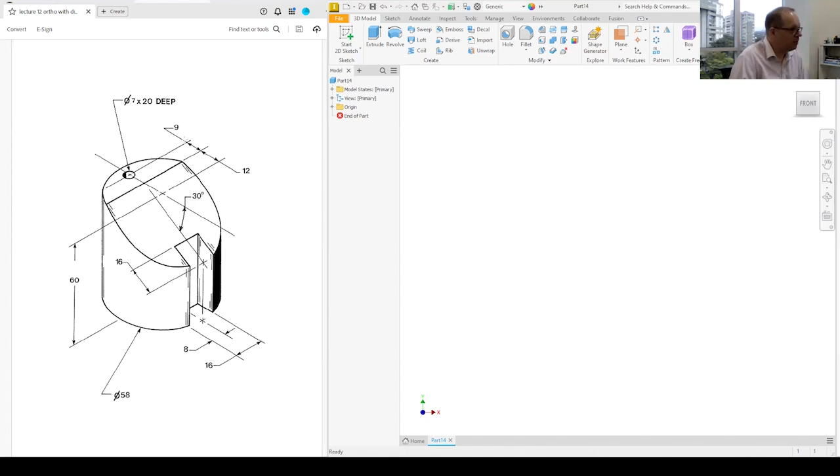So we'd have to measure it there. We can't just make the cut and then put the slope in. We have to first make the slope and then create the cuts.

That might be, think about that for a second, right? Because we don't want to cut in the direction of the slope that we create, but we probably have to do something with projections and similar.

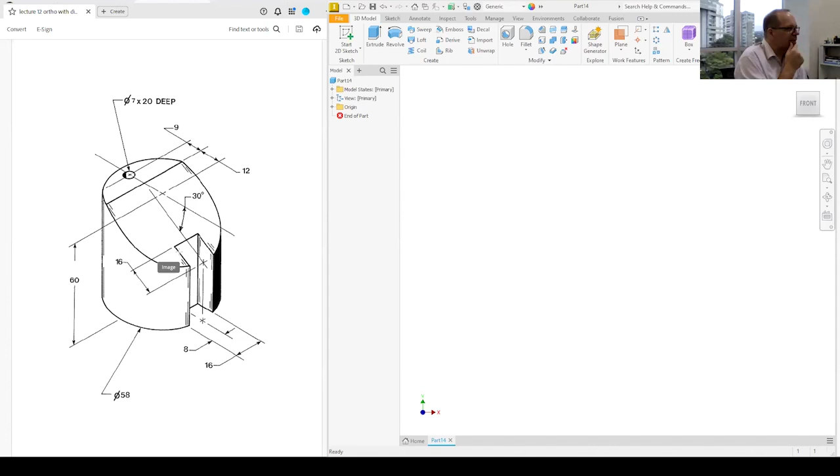All right, but let's get started. Oftentimes you get yourself going and then see where it leads you. First part is easy. Let's put the circle.

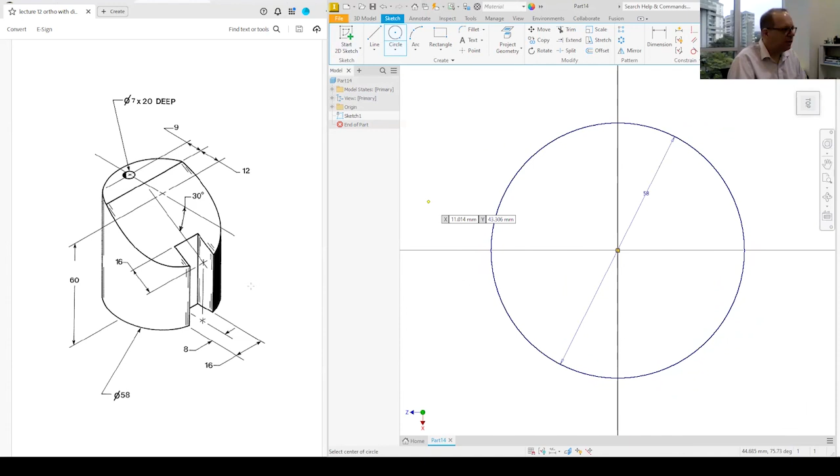What's the diameter? It's 58. Right there. Let's just do that. Might as well.

Extrude. Looks like the top height is supposed to be 60. So let's do that. There we have our outline.

Now let's see. This kind of the edge that we're going on is supposed to be

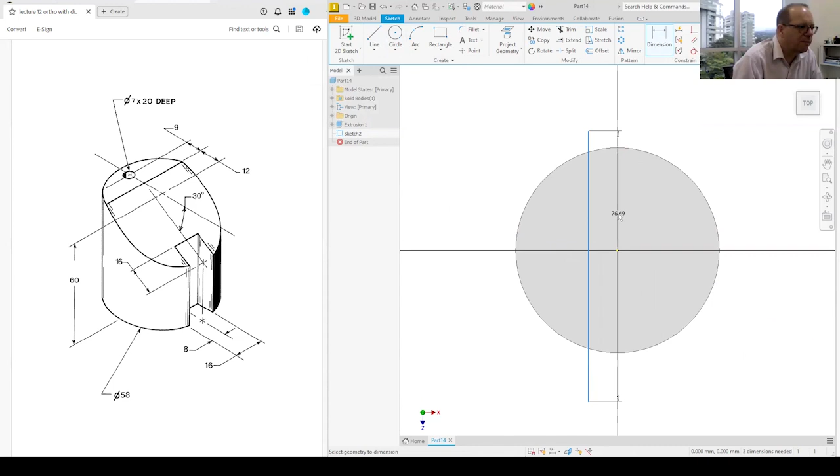12 from the center. So let's do a sketch up here. We'll do a line. As long as it's a vertical line, doesn't matter how long it is, just longer than the circle. And we say we want to do this distance to the center there is supposed to be 12.

Right, that'd be that distance right there. So this is where our slope is supposed to start. So maybe what we'll do, we will create ourselves a plane

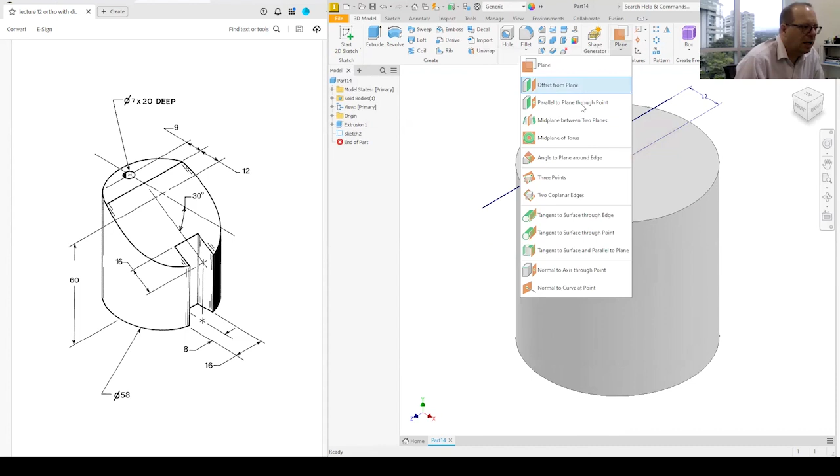angle around an edge. So we want to have this one, and we want to... doesn't want to do that. It's not angle to plane around edge. That's what we wanted. Maybe we wanted this one.

Oh, okay, I just misunderstood what I was trying to do. So that's what we wanted to do. And now we want to have it 30 degrees.

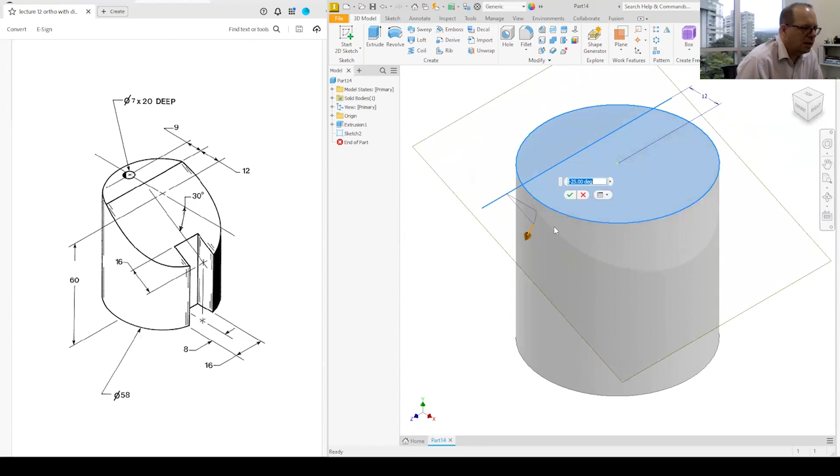Sometimes a little hard to see where it's calculated from. So we can say here, that is 30 degrees. All right, then we'd have, put in our minus 30.

And we have this. So now we could create this cut. Yes. We cut this here. Yes, this is what we'll do.

So we'll create the cut, and then we'll use our regular plane up here to draw the kind of the slot that goes down. So let's do this.

We'll sketch something on this top plane here. What we'll do is we'll create a rectangle. I think it doesn't really matter how big it is. Let's just sketch it in.

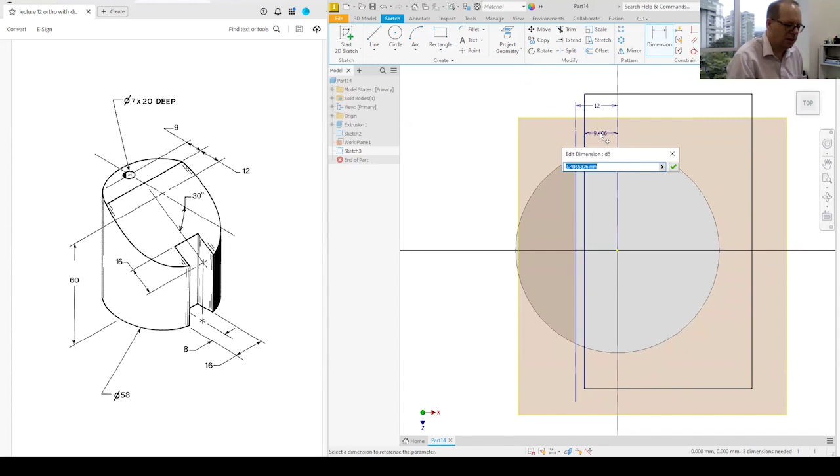Just bigger than our circle. And then we'll say distance to there has to be 12. Overlap. Then we'll say

finish. Then we want to extrude, but we want to do a cut. And we want to cut to. And we'll choose this as what we want to cut to. And then we'll say, okay.

Let's look from the side. Yeah, that's about what we wanted. So now we have to make the cut.

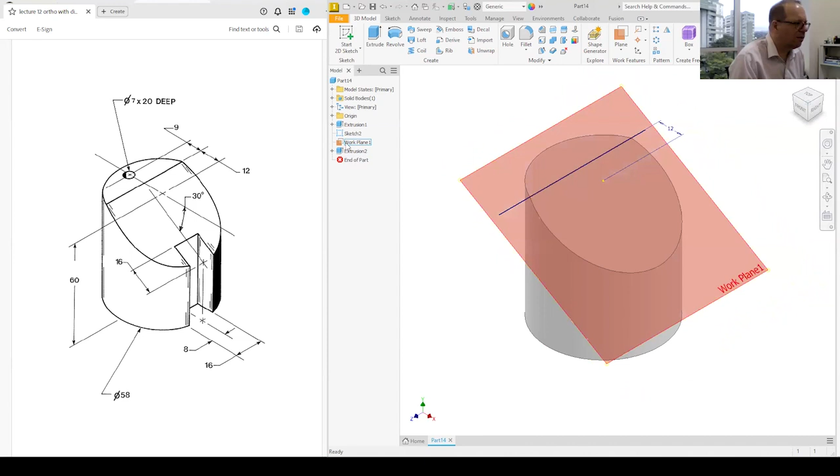I don't think we need the work plane anymore. So let's turn that off. So what do we want to do?

We want to draw something onto here, a new sketch. I think we can actually do the hole and this thing at this. We did need it because we needed the size.

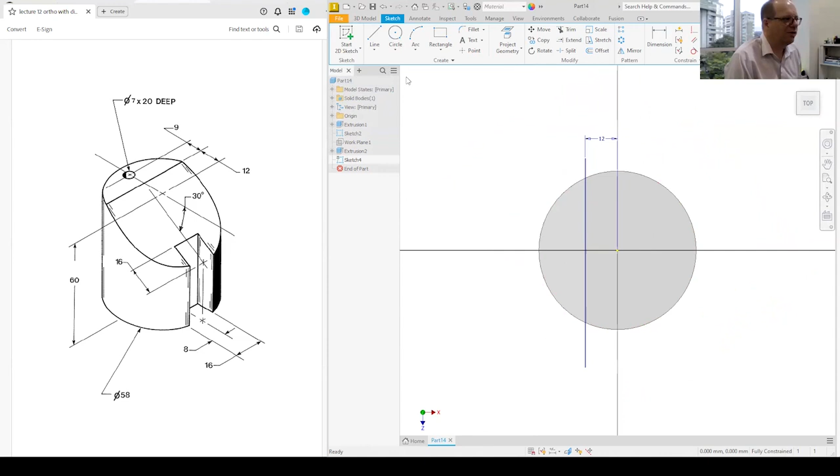Of course, that's why we went all this way. Let's get rid of this sketch number 4. We didn't need it, but we need to turn our work plane back on.

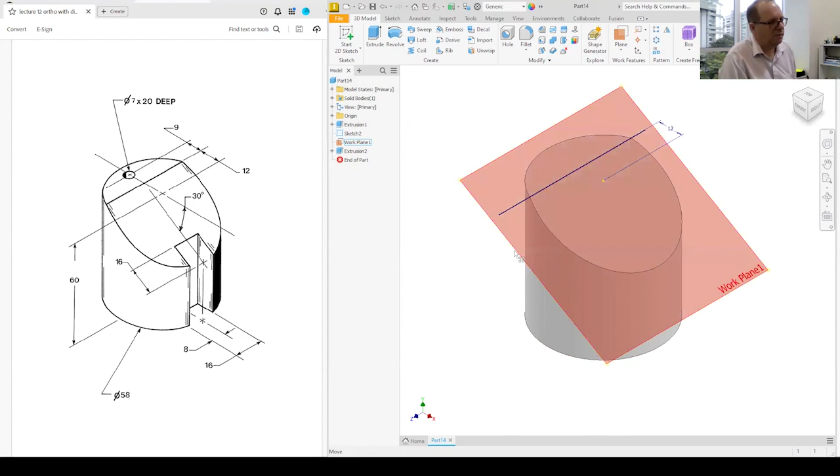Visibility, yes. Now we want to sketch onto here, and we want to have from the circle up to there. So let's do that, do a new sketch.

So we want to do our rectangle here. It goes from there. I don't think we can see that edge there, so let's project that onto what we have. And then let's see if we create ourselves a rectangle.

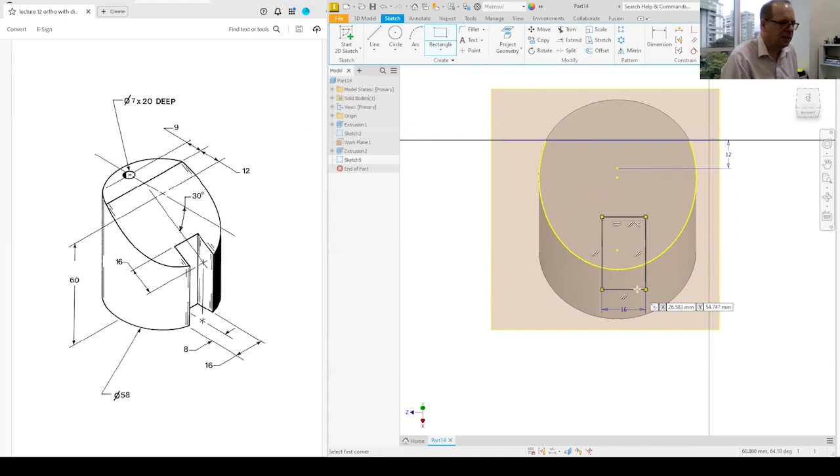Let's just draw a rectangle. It's supposed to have a width of 16. All right, that direction is supposed to be 16. Other direction not so important. We'll dimension it in from here to there. Sorry, oops, I kind of went a little crazy.

Isn't this the? Yeah. What is this? All right, that's not what I was trying to do. We can't do that. Let me think for a second here how to do this.

So I was trying to make, so that's that. Can we use that for our distance? Okay, that's not what we want, but we want to have it 16 from there to there.

So can we do maybe a line? Yeah, we need to have this in the right. A line like this, and we'll do the tangent to that. So that looks good.

Now we can say we want to have this edge from there to there be 16. That's good. And now can we use that point right there? That's on the half point. We can. That distance is supposed to be 8.

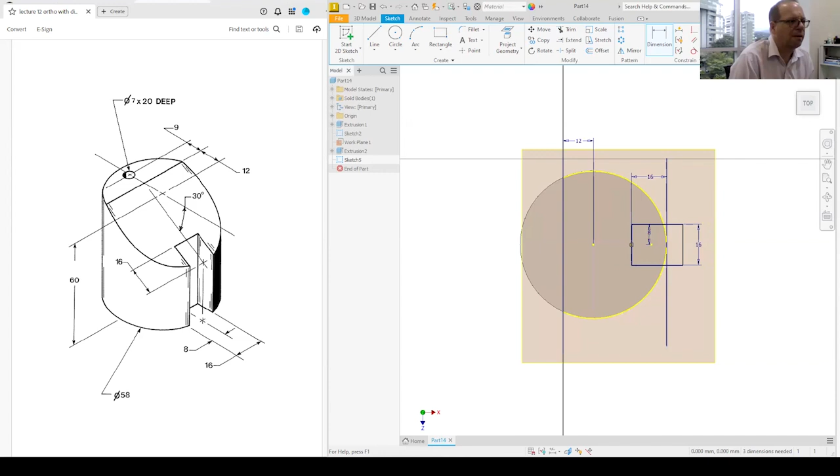And now let's see. Does that look as if it's all on that plane? Excellent, it is. All right, everything's on this plane.

Now we can't make the cut, right? If we just did the cut, it would cut into our little cylinder there. So let's do a drawing up on here. And what we'll do, we'll project this little fellow up to where we are. There we go. And we'll say finish. All right, so it's now up here.

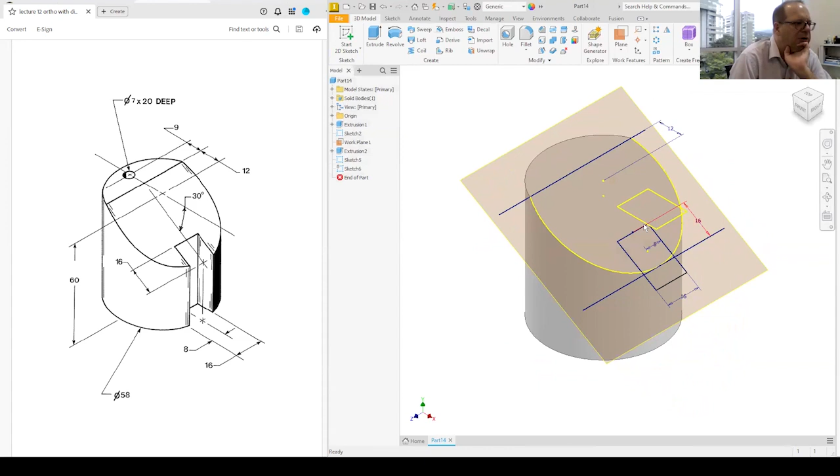This length is not 16, right? It's a shorter length. All right, so let's go back actually into that sketch, just to show this. If I do this distance now, it should not be 16. It should be something that's, oh, definitely not out to there. But I mean, this distance shouldn't be 16.

And you can't grab that line. You need to project it up to where we are. Now we can. So from there to there is something smaller, right? As we'd expect. Okay, good.

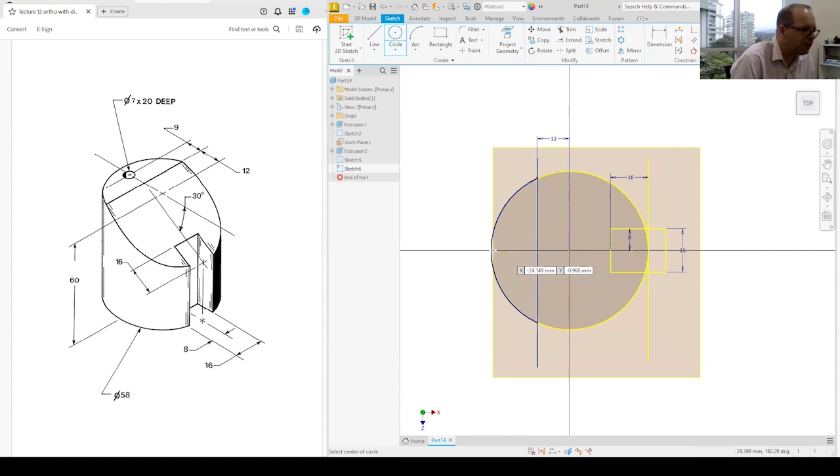Now we can cut that down, but we can also cut the circle at the same time. A little back one here, right? So, oh no, it's only 20 deep, so we should do those separately. So let's make that cut. Extrude, we want to cut, and let's just cut through everything. There we go. And we'll say okay.

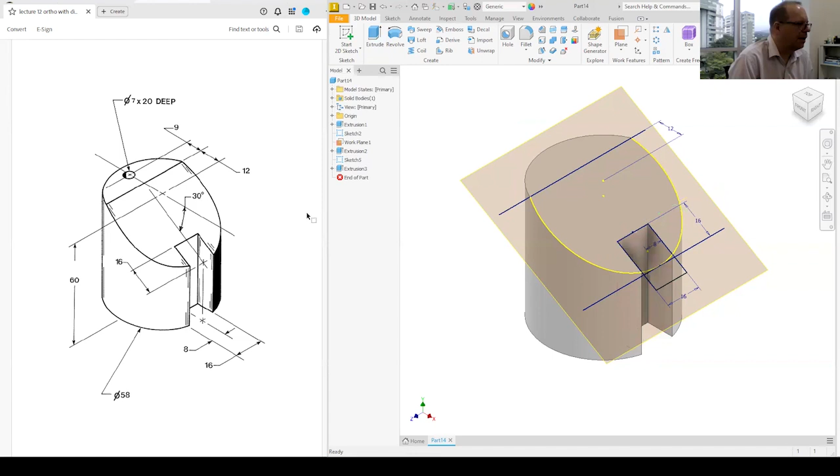And now we can hide that sketch. And we can hide our work plane for good this time. There we go. And then all we need now is our hole that's 20 deep.

So let's do a sketch up here. Do a hole that's on the center line, and it's supposed to be 7. Then let's dimension the distance from where our change is there. That's supposed to be 9.

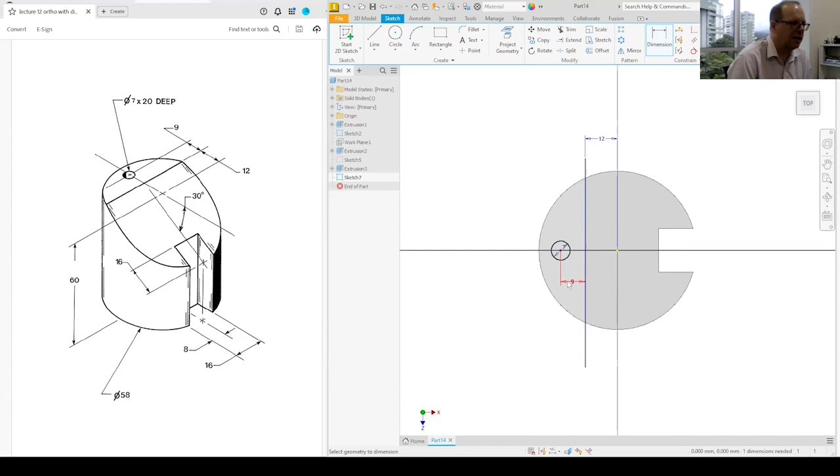And we'll say okay, we'll do an extrusion. And the extrusion is supposed to be 20. All right, then let's go ahead and hide this sketch, so visibility off. And, no, looks about right, I would have to say. So I think we're done with this one.